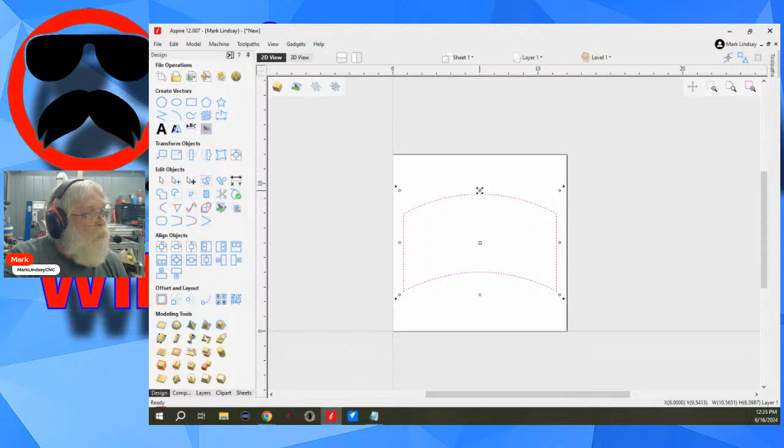There's an irregularly shaped panel. Back over to the design tab. And let's make that a little bit smaller. I'll make it a little bit shorter. There we go. Now, let's say I want to put a keyhole slot.

Well, I make my keyholes just a little bit differently than a lot of folks do. Some folks will use the keyhole gadget. I don't use a keyhole gadget personally. I just draw a vector and use that. So the way I do it is I create a very, very tiny rectangle.

And I'm going to make it 3/4 of an inch tall, so 0.75 high. And I'm going to make it very, very narrow. And that'll be, let's make it 0.02. No, that's still too big. Let's make it 0.006. So 6 thousandths wide. That is not a very big rectangle. And I'll just put it right there.

Close. Now, you want the center of the material. Select what I want to align, then select what I want to align it to. Then I'll go into my alignment form and I'll come down here, align to selection. This is going to align the first selection to the last selection. If I have multiple things I want to align in here, it'll align all of them to the last selection.

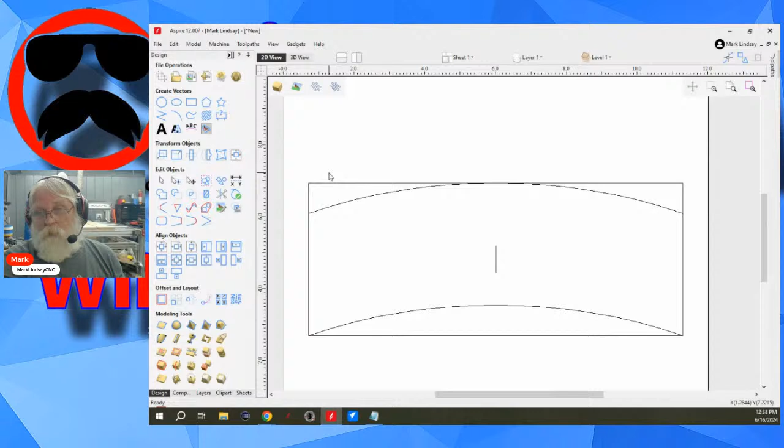So then to make the keyhole complete, I'll select my little rectangle here, tap N to go into node editing, and you really got to zoom in close. Right click, delete that span. There's my entry point. Come out of node editing, and

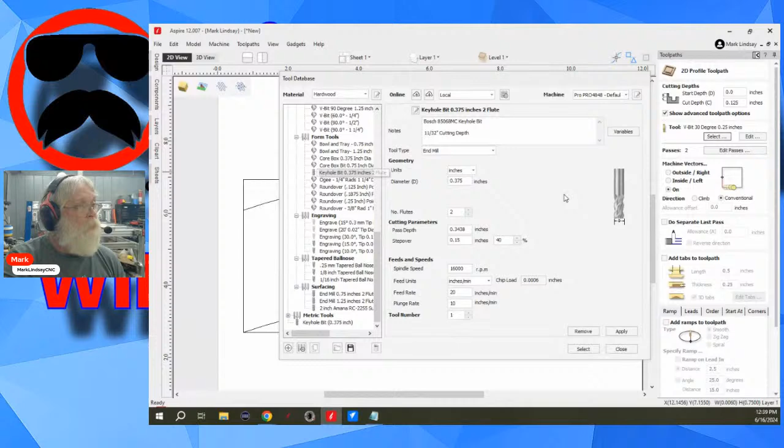I'm going to come over and do a profile toolpath using my keyhole bit, which I have down in my form tools. And I will select one single pass. Got to make sure that it's going to do it in one pass. Now, because of the way I have this made, it's going to plunge right here to the full depth of the keyhole. It's going to move up. It's going to come back, then retract. Okay.

So now, because of the way Vectric displays its bitmap based, it will not show an undercut. So it's just going to look like a slot, like an end mill cut it. But that will be the keyhole. That's how I do my keyholes.

This is also the only G code I ever keep. I create G code with my XY datum set to the center. And I place this keyhole so that the center of the keyhole is on my XYZ0.

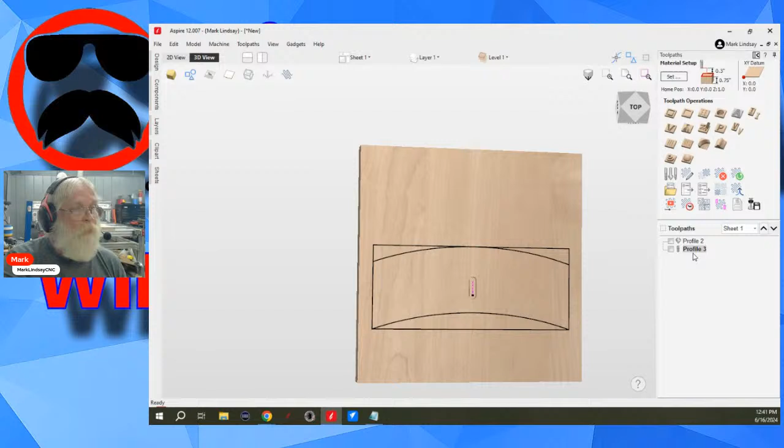From here, I can mount a piece on my table, figure out where I want that keyhole slot, mark that as my 0, and then set my XYZ0 to that place, and then cut the keyhole. That's the only G code I save. I have that saved on my other computer.

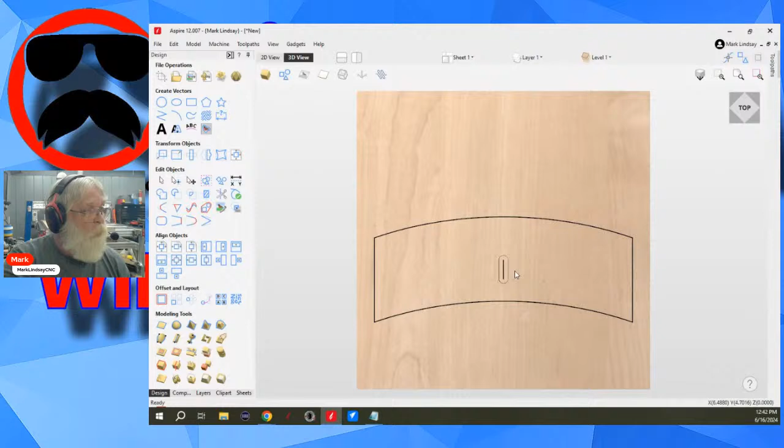Dwayne is asking, does that bounding box show on the 3D view? I don't believe so. Let me go back over here to the top, and I will move that to layer 2 just to get rid of it. So let's see if it shows the bounding box. I want to move. Nope. I want to align this to this. And let's look in the alignment. No, it does not show that bounding box in the 3D view.

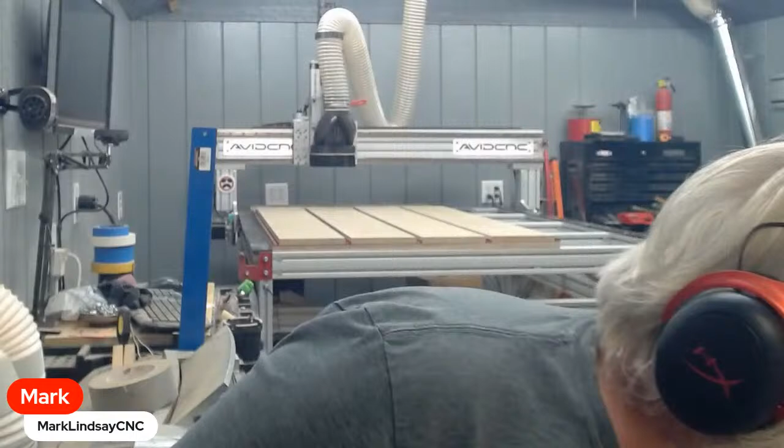Vertical keyholes I use in certain situations where you can pretty much guarantee it's not horizontal, or it's out of balance or anything like that. And usually in round things, I'll put a vertical keyhole in the center. So let's see here, hopefully I got that. That answers that question.

8 Center asks, is there a way to inverse the depth map in VCarve Pro for STL models? I got one from Printables, but it didn't load right, and I think it's because it's inverted. Let me ask you this about that: is it a case of it's cutting the model negative versus cutting it positive?

Because I'm going to go ahead and close this. No, I'm not going to make any changes, and I'm going to open up VCarve. Let's see here. Create a new file, and we'll make that 15 by 15 by 3/4 of an inch thick, XY datum. I'm going to bump my modeling resolution up to very high because I'm going to be putting a 3D model in here. Okay, now I'm in VCarve Pro.

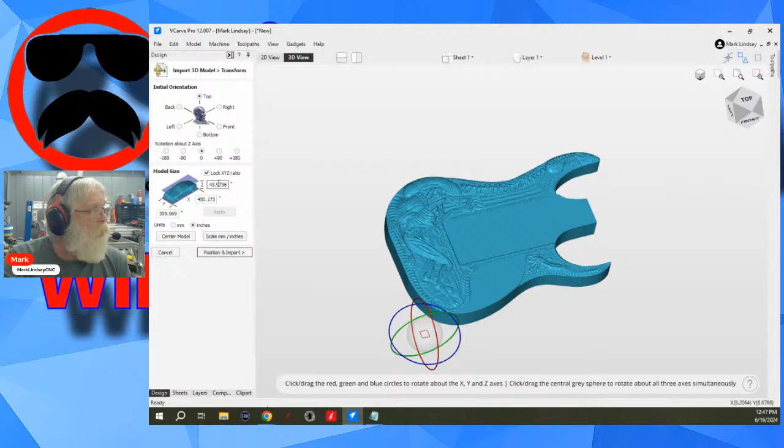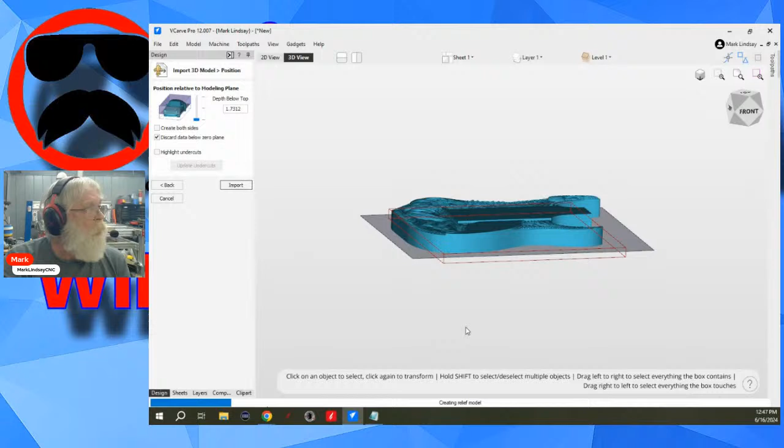It's bigger than the material, but what the heck. Okay, the first thing I need to do, looking at these sizes, is I need to scale it to imperial from metric. I need to center the model. This will work for our purposes of our demonstration. Now I'm going to position it. Nope. Left click mark, and we'll go ahead and bring that up. Put the modeling plane on the bottom. And I'll import it. All right, so if I look at this in the 2D view, I have it selected.

Will it invert? Okay, let's find out. We can go into the picture editor and we can invert right here. Make sure it's selected, invert it, and the answer is no. It won't invert the depth map.

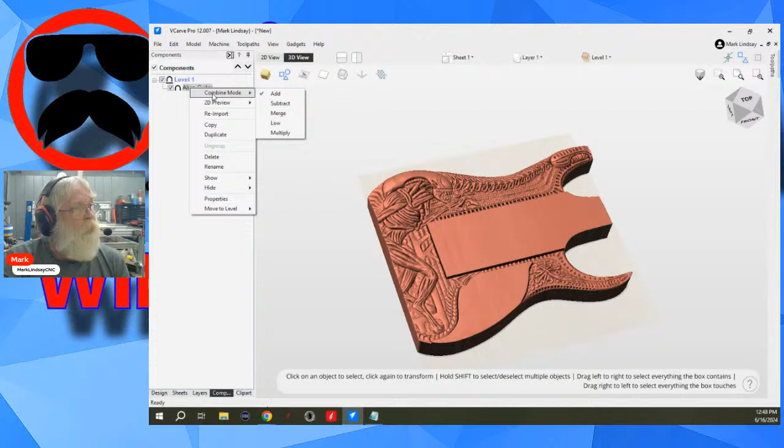What I will say, however, is come over into your component tree and take a look at the combine mode for the model. Now, the combine mode on this one is add, that upside down U. I can right click, go into combine mode, and make it subtract. And that will carve that relief into the material.

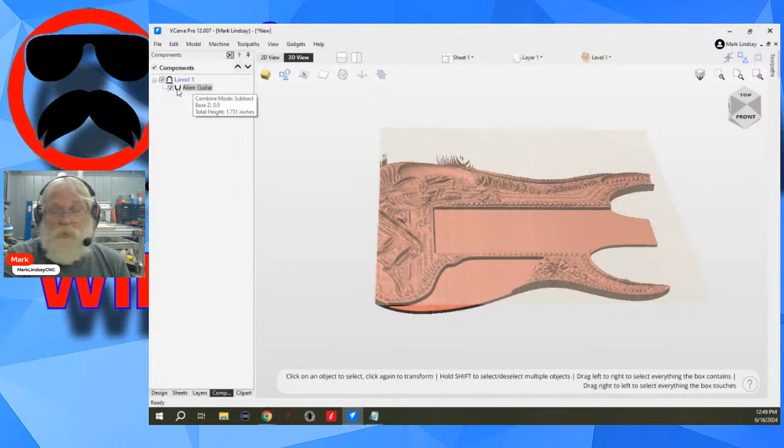It's almost like a mold, for example. So if your model is coming in like this, check the combine mode. Even if it says add, if it's inverted, if that depth map is inverted, by switching the combine mode it should invert which direction it's going to carve. So if it's reverse from this, maybe you need to go over to subtract. It doesn't make sense, I know it, but that's about the only thing I can think of.

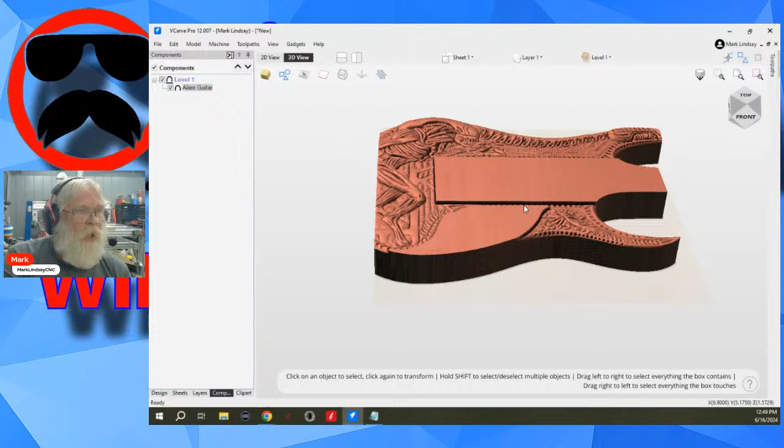Be very wary of getting into image editing software and trying to invert a depth map. A depth map, while it is technically a grayscale image, there's more to it than that. It's more of a gradient than most imaging software can mess with. You know what I mean? What I mean by that is the size of these pixels that make up this bitmap are usually more than most imaging software are willing to work in. I'm not going to say they're not capable of it, because some of them certainly are.

But for instance, if we look at this model in particular, I go back into job setup. What I've done is I've divided my material up into 4 million points. And this bitmap is going to be broken up, and those points are going to be scattered all over the material. I can go even higher than this, but I wouldn't do it simply because there's no need for it. But odds are your imaging software is not going to break it up that small. It probably could, but you need to know that going in and set your resolution to that. And that's going to be a tall order.

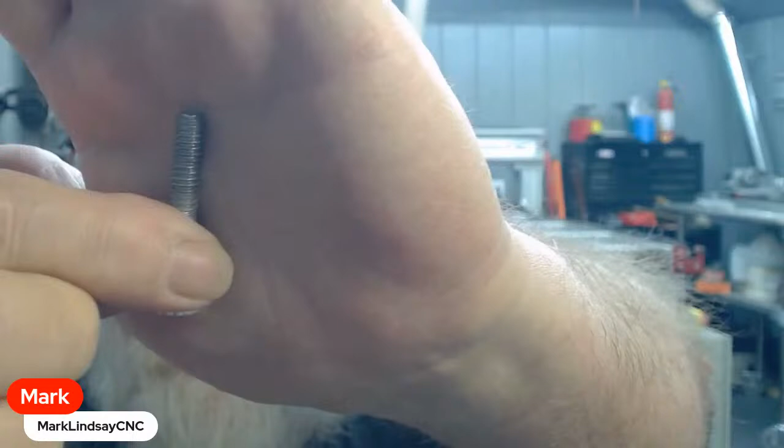These are some pretty fine threads for woodworking. And it's not going to focus. That's all right. Well, there we go. Those are some pretty fine threads for woodworking.

Kurt H is asking what size thread is good for woodworking. I guess that would be a good place to start. It depends on what you're trying to thread. Are you making external holes? Are you making internal holes? Are you— excuse me. Well, Kurt says, as I was asking the question, quarter inch is way too small. Yeah, it is.

Most of the instances where thread milling is used in woodworking is like a threaded top on a box, where you're talking about something that is 2, 3, 4 inches in diameter. And the internal thread is similar, and so they'll screw together like so. It's very rare that you will want to put threads into a piece of wood and then tighten a machine screw or bolt into it. If you're going to do that, over drill it slightly and use a T-nut on the back.

Leo has a good point here. Put CA glue on the wood prior to tapping. Yeah, I've heard that.